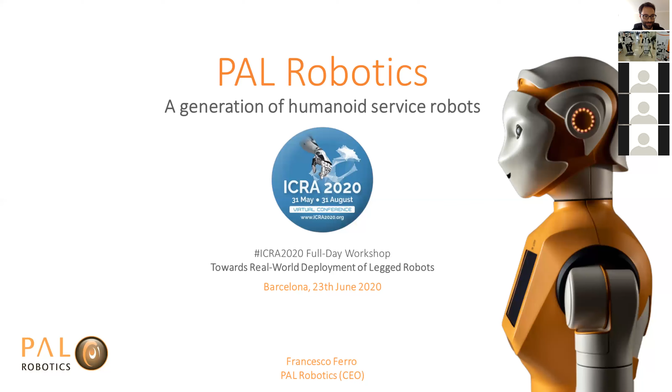Okay, thank you very much, Dimitrios. And thanks to ICRA also for giving me the possibility to present a little bit about our company to this workshop. I'm sorry to say I will not enter too much into technical detail, but I will try to show you our development during the years. For this reason, the title of the presentation is A Generation of Humanoid Service Robots.

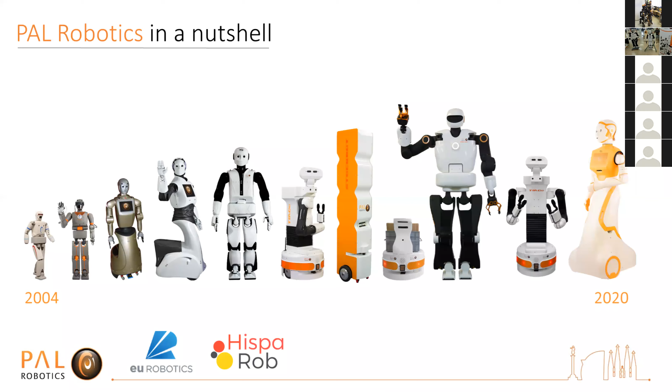Let me show a couple of slides about PAL Robotics, because we did a lot of changing during these years. This image is quite important to show all the developments we did in the last 15 years. We started in 2004, and up to 2008 more or less we were only focusing on technology development. We had one single client from UAE, United Arab Emirates, and we did all the first developments for them with some very amazing platforms that you can see in these slides.

Then, from around 10 years ago, we started step by step entering more and more into business detail, and we opened different business units, as you will see later, with the different robots that you can see here.

About our expertise, probably you know better than me that robotics is very complex, because to have success with real business and real use cases, you don't only have to focus on hardware or software, but also on community and users, and solve needs with the real client.

For this reason, we focus on integration and solving use cases in different domains. Probably the most important one for us is R&D, because we are working with the best universities and innovation centers all around the world, providing our solution to boost their own innovation.

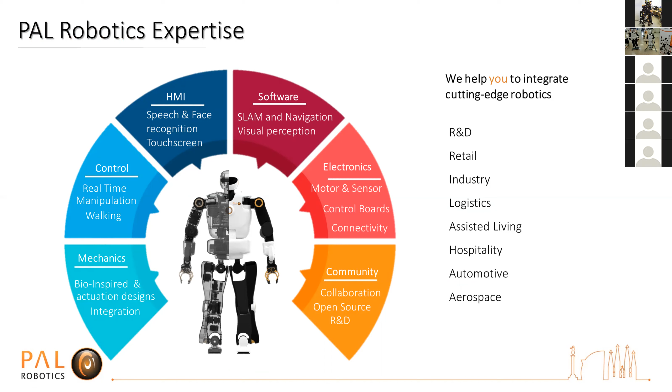Internally, we did this differentiation last year. We developed different business units, like I said before. One that is very promising is the retail unit.

We have an inventory robot called Stockbot. We use RFID and also vision to check all the elements in a retailer. For example, we are working with 5 of the best retailers all around the world. One of them is Decathlon, which also did a beautiful video about it some months ago.

Apart from the retail part, there's intralogistics. We are using our development about mobile navigation with our mobile base, and we add a lot of add-ons to make these roles in healthcare and light industry better. So we have platforms that autonomously are able to transport goods.

Then we are quite active in collaborative projects, and like I said before, the most important part is research. For this reason, we have a product for research where we help companies and universities develop their own algorithms or use our platform without taking care of hardware development, because we did that for them.

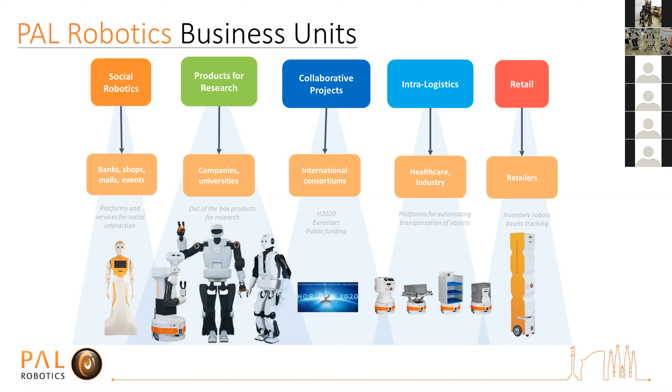Recently we also developed a social robotics unit where we are pushing ARI, that is Artificial Robot Intelligence, a platform for social interaction. But I will not speak anymore on that, and I will focus on the humanoids part.

At the moment, just to finish with the slides about the company, because I took more than 3 minutes which was not planned, I want to mention some European projects where we are active. At the moment we have around 15 projects open, and as you can see in the categorization, ongoing we have not only healthcare or industry, but also a lot of R&D, and I will speak later on a couple of them in the following slides.

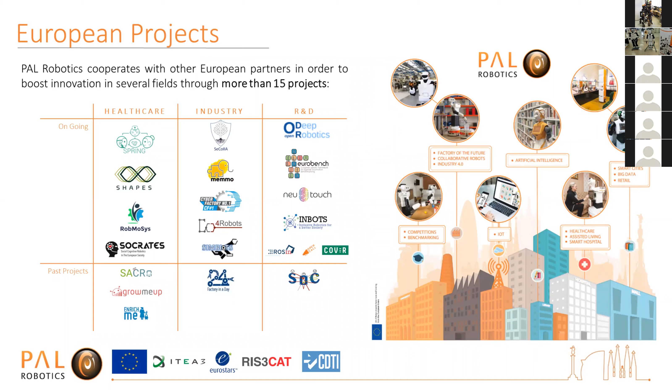But now let's see a little bit our vision about humanoids. And when I spoke about humanoids, at that moment, I will speak only about legged biped humanoid robots.

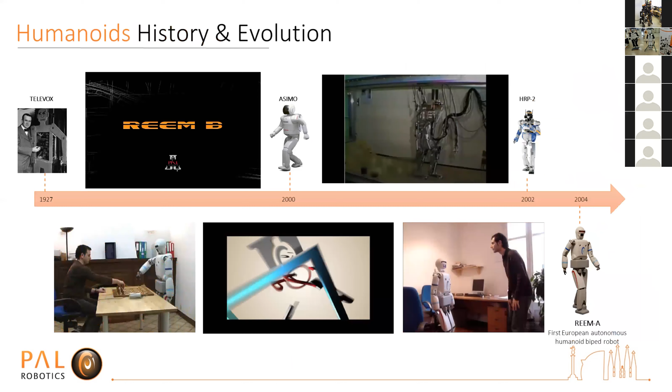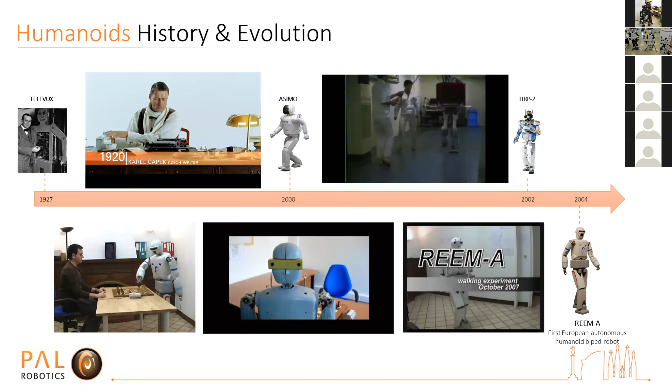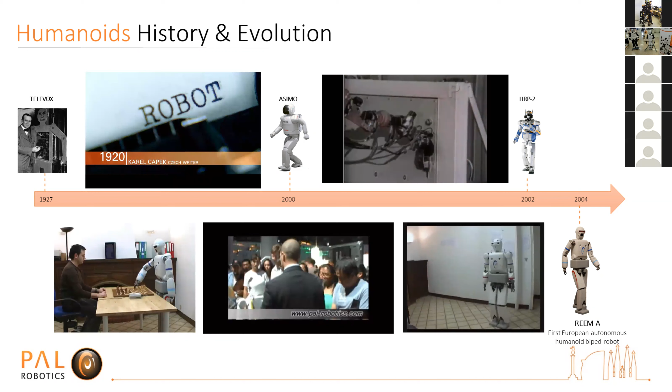So if I have to make a little history and evolution of this field, here you can see different solutions. PAL Robotics started their development in 2004, but there was a lot of development done before, from the first robot called Televox in 1927, and in 1920 where Karel Čapek just invented the word robots, we have seen a lot of developments.

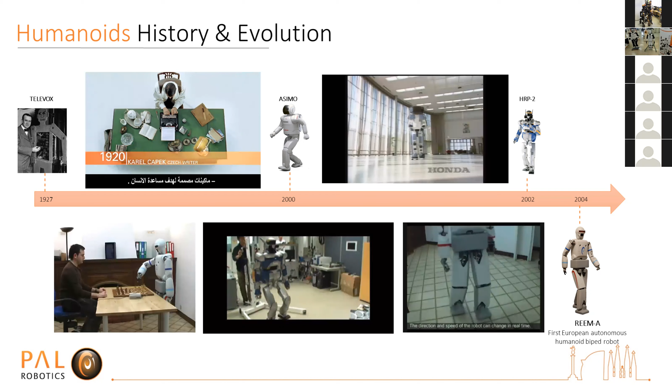We have to mention a big effort from Honda that made ASIMO, a very amazing robot, and they are still continuing this kind of development, and it was really nice. Another special mention has to be done about all the developments from Kawada Industries, done with HRP2, HRP3, 4, 4C, and they did a great job.

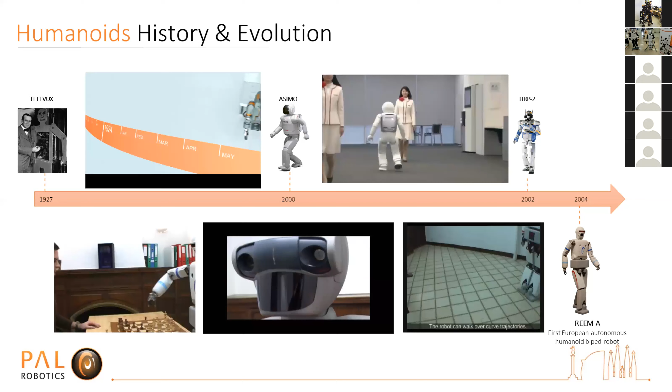And this is something that is very important for the history of biped robots. In between all these big developments, we have to mention also our development, our first project called REEM-A. We did it in just one year, in 2004, and it was a robot that was able to play chess.

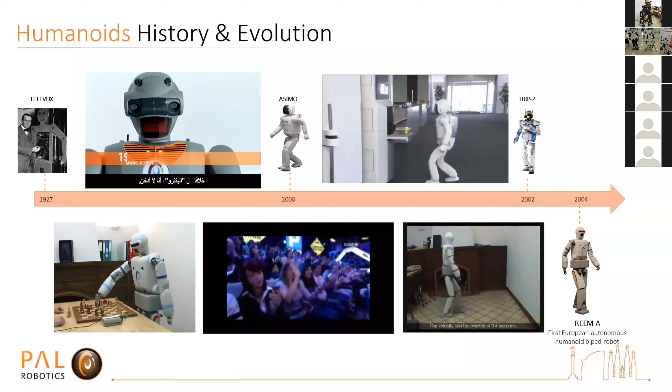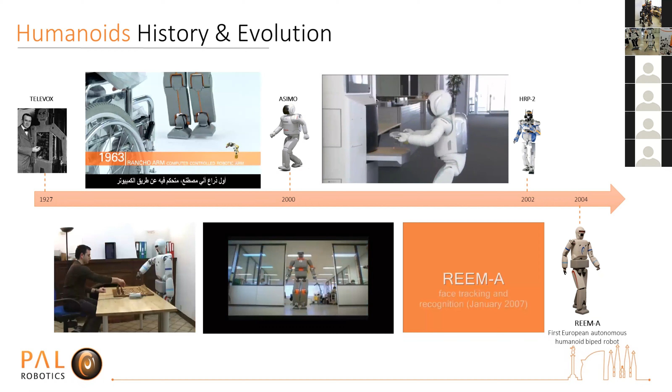The idea was to have a robot that is just walking, go near to the table, and able to play chess with a human against a human. The idea was to connect this robot with a big project called Hydra, that they did in the UAE, a supercomputer able to play chess against the champion of chess.

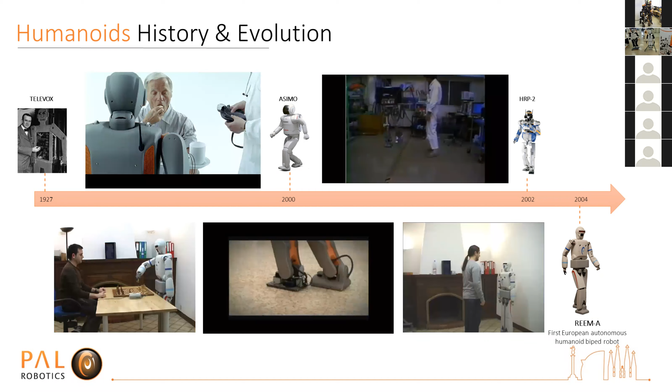Just to have an idea, it was 10 times more powerful than Deep Blue, which was the first computer that won against Kasparov in the 90s.

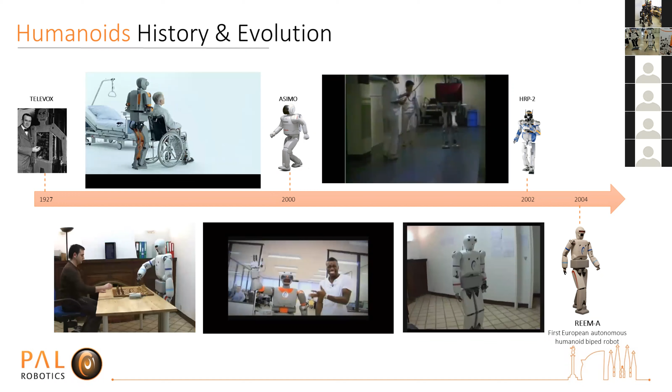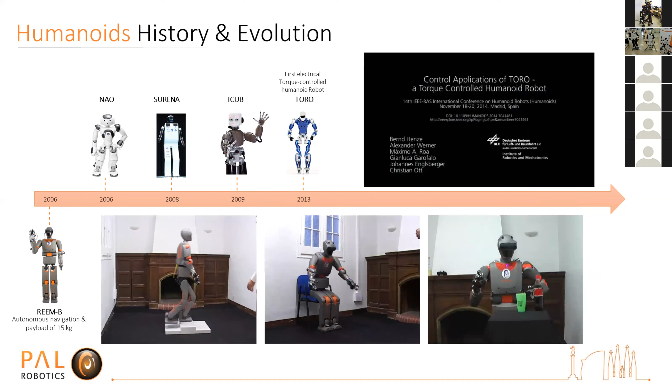And then after that, we also had other beautiful developments. We did our REEM-B, more or less an evolution of REEM-A, in 2006, lasting a couple of years more than the REEM-A. We also had autonomous navigation with a very special solution, because we had a laser in the feet of these robots.

More or less at the same time, we had other developments, like NAO from Aldebaran Robotics, now called SoftBank Robotics, Surena from Iran. A very big effort was done from Italy, from IIT, the former institute where Dimitrios was also working, with the iCub solution. They also did COMAN and other developments on biped robots, so they are a very good inspiration for us about legged locomotion.

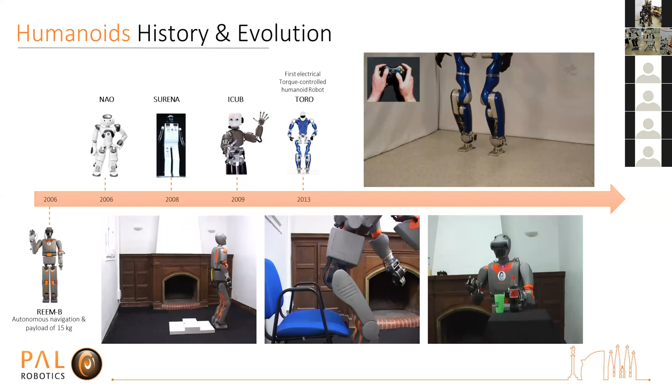Another important mention has to be done with Toro, the first electrical torque-controlled humanoid robot, where you can see here. From this development, which you can also see in some of the video, they did a lot of projects and they are very good at that.

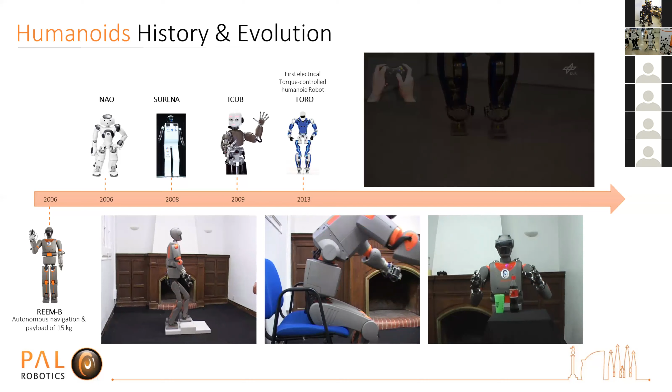We had our inspiration to create our own development, which you can see later, called TALOS. But in 2013, another big step was done, and we started with our first product for research and development called REEM-C. C is just because it's the third evolution of the robot after A and B, and as you can see, it's a very robust and safe robot.

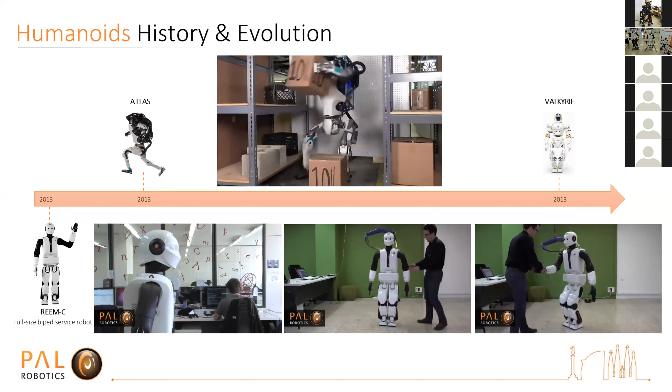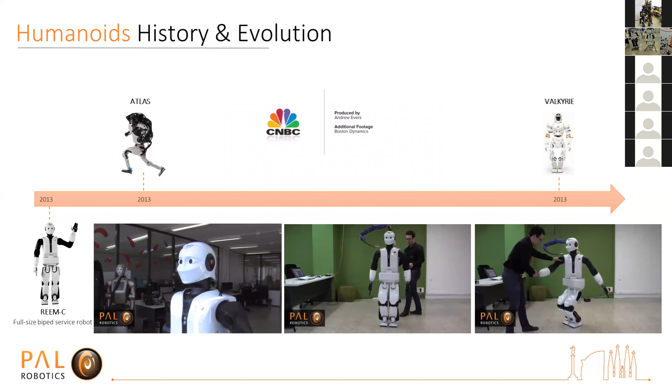So our idea is not only to have a robot that is able to jump, run, make the parkour, like the beautiful Atlas from Boston Dynamics was able to do. It's a little bit different because we want to get closer and closer to the real use of clients, who need a robot that is robust, able to not fall down, and have good equilibrium and walking without any protection, while also being able to carry weight.

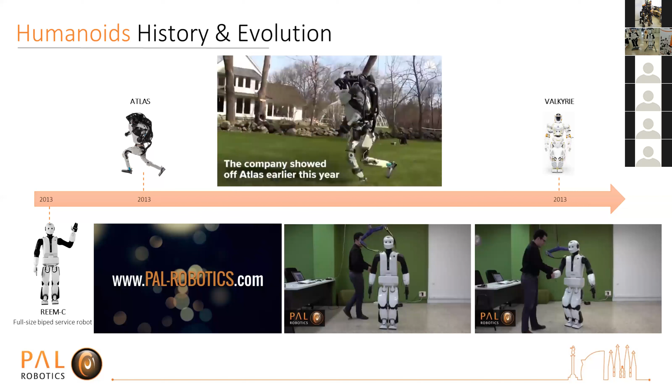For this reason, you can see here the robot where you can just push the robot and it is able to recover, having also the torque control where the whole body control makes the robot able to stabilize itself. We also have to mention in 2013 the development of Valkyrie from NASA, which was quite a nice development.

All these developments were for us an inspiration. Another inspiration I have to mention is Cassie, but yesterday you already had a beautiful talk that I've seen on YouTube about the CTO, from the CTO of Cassie.

Now I want to speak a little bit about the Talos, our development. We showed these robots for real at IROS in 2018. If you had the possibility to see the robot, we also shown this video that you can see here in direct, and probably you can also see some of this demo with the robot.

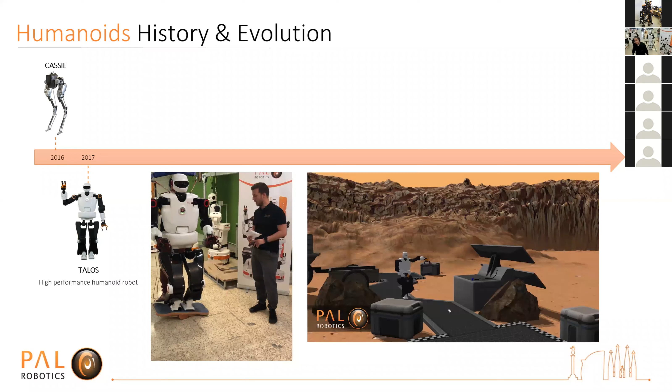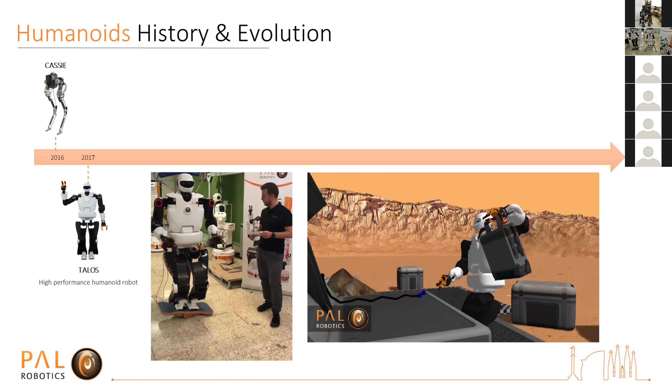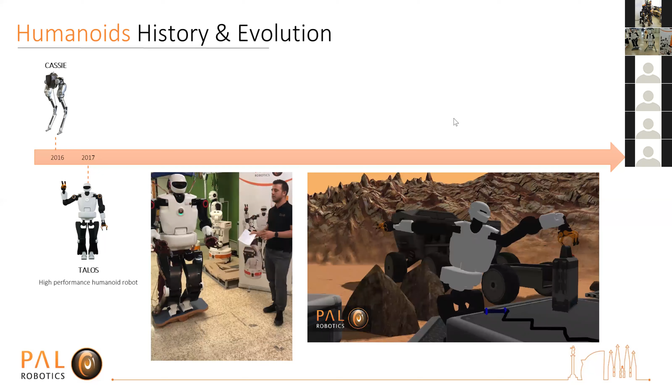Four people participated and got to the third position of this amazing competition. So this is more or less a background about the robots that we developed, but also in the big scenario all around the world.

Now let's speak a little bit about our own robots. Here you can see the TALOS, which is the robust robot that you can see here. We have a very easy way to also change the hand. Here you can see the 5-finger hand that we did in co-development with University of Pisa, with Antonio Bicchi. Now they also have a commercial product called QB Robotics. Purchase it if you have the possibility, because it's an amazing robot.

What we did here is to have only one motor to close the hand, but 3 different motors in order to move the thumb, the index, and the 3 other fingers in an independent way. The robot here, you can see, we are now working with it in position control, but we did also different developments for different projects, integrating different cameras, and here you can see a line array of microphones, with the idea to have a stable working system.

We should not underestimate one of the most important parts, that all these robots work with ROS. It's an open platform, and this is a huge amount of software that was done from our side in order to guarantee that the robot is robust. It can work in a stable way, and could be used also by students.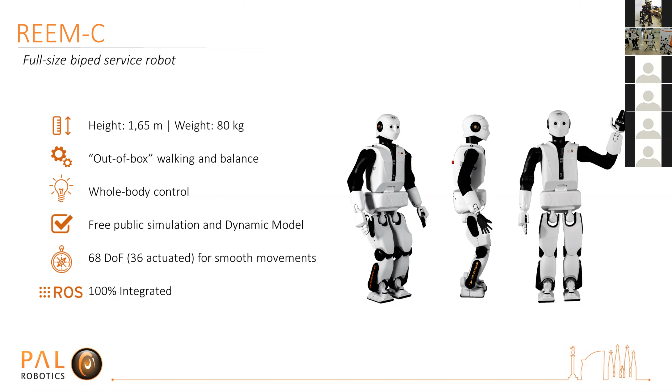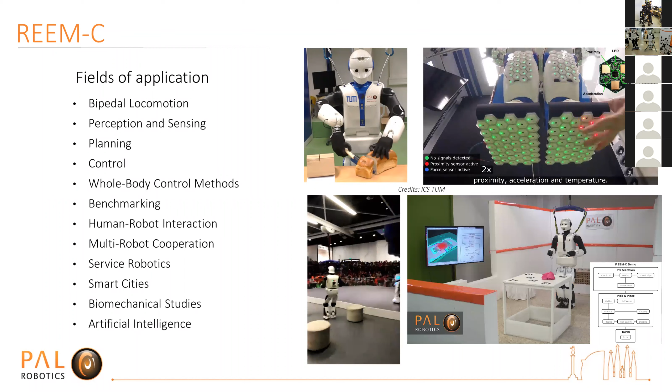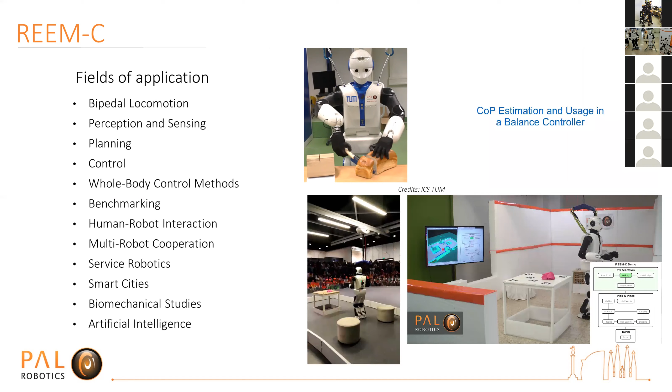From this idea we had the REEM-C, you can see here, and on top of this platform, different clients, for example we have to mention the Technical University of Munich with the department of Gordon Cheng, who is also one of the chairmen of the next Humanoids 2020 conference in Munich. They did a different application. Here you can see a list, not exhaustive, of applications.

Also you can see a development we did for a big, huge museum in China, where we developed an application where the robot has to work 8 hours a day during working hours in a museum, making a show autonomously. The robot is able to navigate in the environment, clean a table, sit down on a chair, and do all these things in an autonomous way.

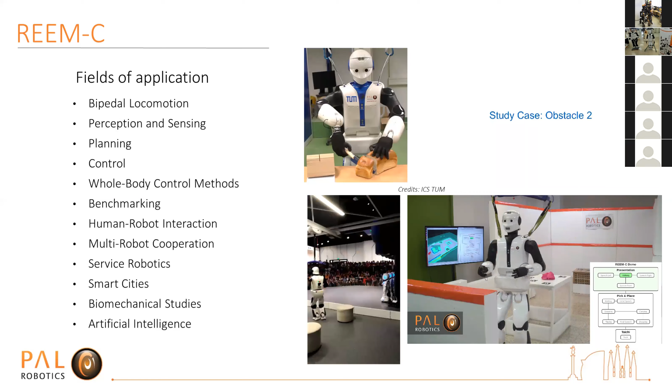The development that they are doing very well in Munich is about the robot's skin, another sense that we would like to integrate in our robots in order to make things easier from a customer's point of view. We also have a project called NeoTouch, with a PhD who will work with us for the next 3 years in order to make all this integration with our robots.

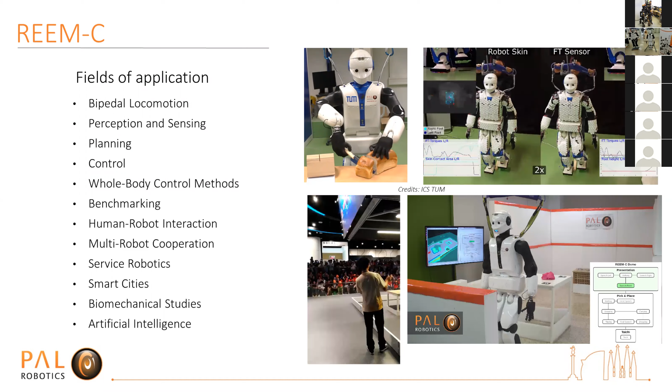Another important thing to mention is a project called Eurobench, where one of our REEM-C robots, with a different head and other changes we made to the platform, will be placed in Genoa, Italy, at the IIT facility. Researchers can use this robot to test their own algorithms, for example on biped locomotion, and to benchmark their own platform. So if you're a researcher and you've invented a new robot or new legs, you can compare it with our REEM-C.

In our view, this is the right approach. We need more and more benchmarking to see which kind of robot is better. How can we compare, for example, a REEM-C or a Talos with an Atlas or an ASIMO? We need benchmarking to understand that whatever works well for one application probably isn't enough for another.

This project has two open calls. One already finished last year, and the other will finish on the 31st of August this year. You could receive up to 100,000 euros to apply, use the robot, use the facility, and in my opinion, this is a good way to make these kinds of biped robots better.

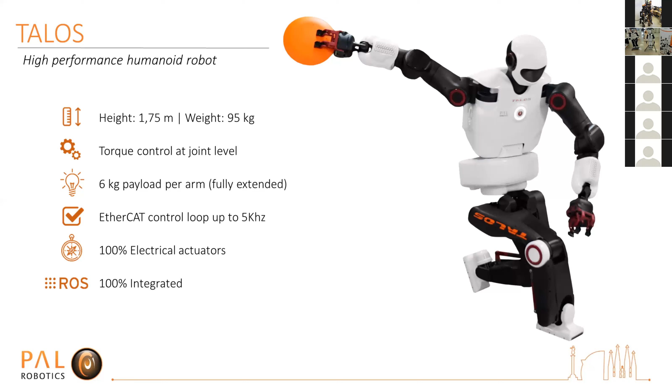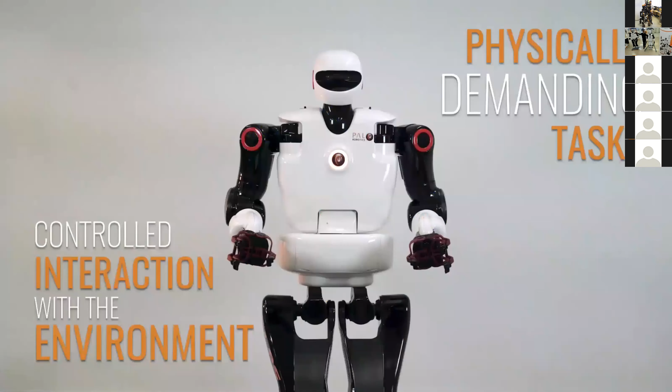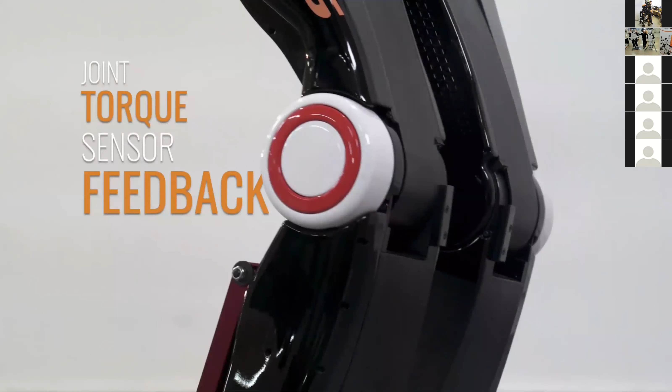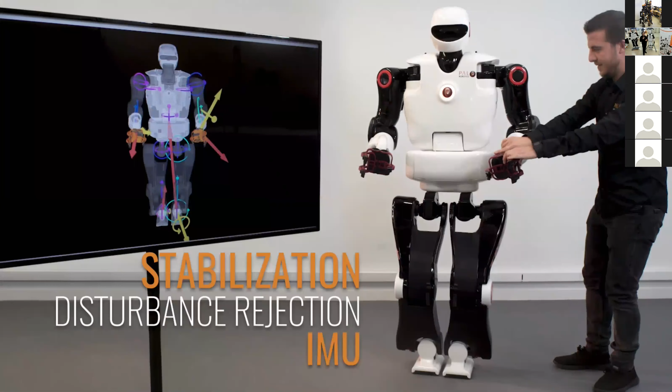Regarding the differences from the REEM-C, I should also mention that the Talos is based on ROS, and one of the most important layers we've built from scratch over several years is ROS Control. ROS, as you probably know, was created by Willow Garage for the earlier robot called PR2—I've seen there are still some of those platforms available around the world. What we found is that this middleware was fairly agnostic about robots, but not at the control level. For this reason, we built a layer and made it open source, so everybody can download and use it with this robot, allowing a completely agnostic way to work at the control level.

Now we're also working on ROS Control 2, and there's a community pushing to move from ROS Control to ROS Control 2, the upgraded version for the robots.

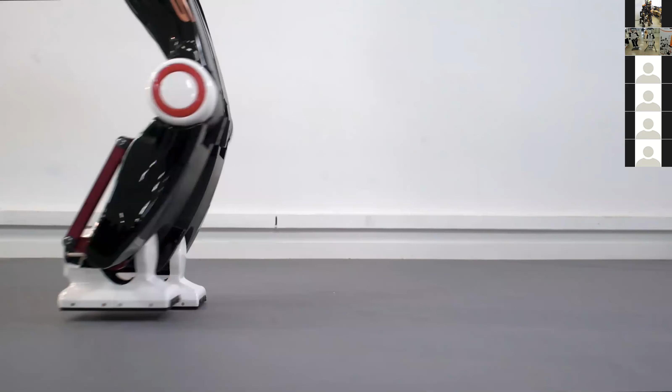And so what we would like to do is also to have even the REEM-C and the Talos working in ROS 2 with these torque control parts. And yes, this is also a beautiful video that we put several years ago online. Here there's a compliant control stuff that is just to show, but I will show you later after the presentation this demo live, that probably could be also more amazing.

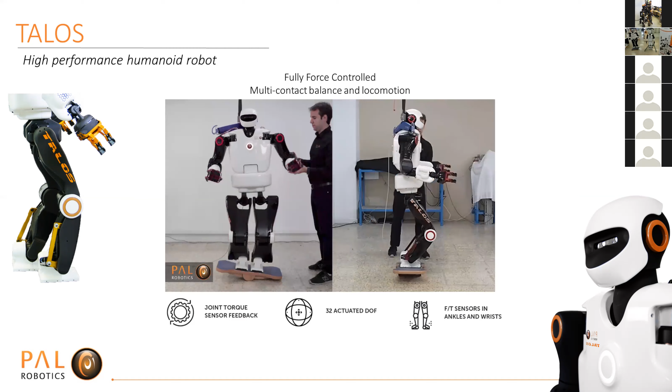And the idea is to have all this robot that is doing this stuff. So let's wait a little bit to have this real part.

Another thing that we also showed at ICRA a few days ago is, thanks to the MEMMO project, a European project, the robot working on debris. So the idea is that the robot can also work in uneven terrain, like you can see here. Probably you can recognize the scenario, it's exactly the same scenario we did a few days ago.

So I can pass to you also the link where it was recorded. Today we will do another demo instead of repeating this.

The MEMMO project is one of the amazing projects in Europe funded by Horizon 2020, that is Memory of Motion. The idea is exactly to understand what is better to do with deep learning, that everybody now is speaking about, what is better to do with the real control laws and rules that we are using in robotics since scratch, and also remember the movement that was already done in order to not repeat all the computational costs that sometimes we are redoing when we have to make a simple motion. This project will finish in 2021.

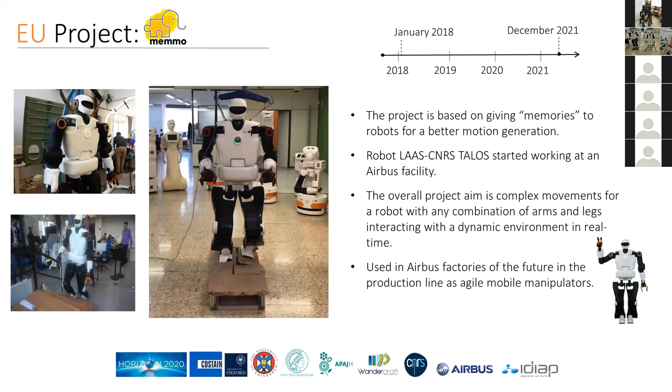Now I will go a little bit to the conclusion, the classical conclusion that if you've already seen some presentations we always put: robotics is something that is exploding. Service robotics is something that is just starting. We started in 2004. And the idea is that it's not only one company, even the biggest one, that can do this work alone. So we have to collaborate, we have to work together, we have to make this kind of robot more and more robust, more and more precise, and we have to give robustness in order to have use cases working for the real world.

For this reason, we need to interact with customers from scratch, because if not, you can do a development that is very amazing but then useless for the real cases. In order to do that, because we are talking about disruptive innovation, we need to have a lot of passion and motivation. This is a must in order to work hard on this kind of platform.

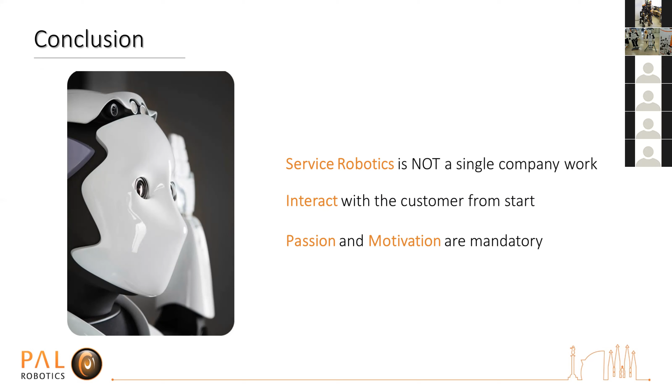After this conclusion, I would like to give some hints about the developments we are doing. Probably you have noticed that we used to do one biped robot every year at the beginning. Then we specialized in order to make the code and everything more robust and more professional, like at the point where we are now, where we are working on a new platform that could be more efficient, with a new mechanical layout.

The most important part is not the ability to jump, which could also be very amazing, but is the impact resistance. For this reason, we need to design a lightweight robot. So the idea is that we would like to have a robot that, even if you run the best algorithms ever in the world, it can also stand up alone without any brain.

So we need to have robustness. That has to be one of the first things that we need to do as a company, and as real dreamers of biped robots, because we really love to see more and more robots like ours, and the other competitors that we have, in real life solving real needs.